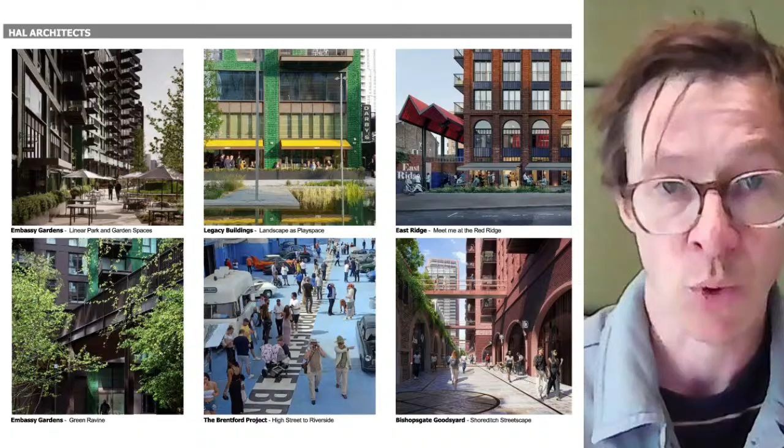Hi, yeah, so we're landscape architects, and our practice is experienced over the last 40 years with a focus on urban regeneration, which is all about community building through creating new neighbourhoods, with a focus on social activity and biodiversity. And there's a wide range of examples here across parts of London and also other places. And we, as David said, we like collaborating with HAL Architects.

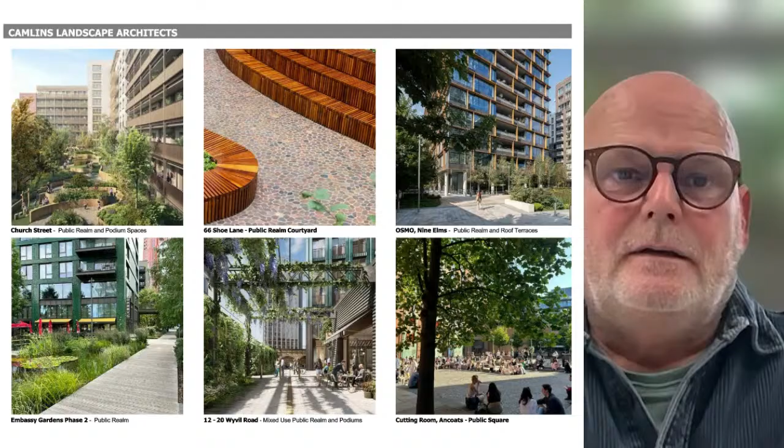Next page, please. So our approach here at Colliers Wood is actually really typical and is based on thinking about the quality of public realm and about thinking of the centre of Colliers Wood as a whole, and asking ourselves the question, how can this development maximise benefits to the place as a whole?

And actually, there's a lot of very positive things about Colliers Wood, as we all know, with the green spaces, schools, churches, public transport, road crossings and infrastructure and so on. So how can we build on that for this scheme? And there's two key moves here.

Firstly, greening of the space between the tube station and Britannia Point, where we're thinking about making a lot more greenery and including cycle parking. And the second big move is the new green link, which links from the end of South Gardens diagonally across to the entrances to the park on Merton High Street, which is a car-free link. It's a green space, playable space, lots of active frontage.

Our buildings focus on it, so it's a family-friendly space. And there are many places in Colliers Wood that are nice, family-friendly green spaces, and this needs to be like that. This needs to be a really high-quality space right in the centre. Thank you.

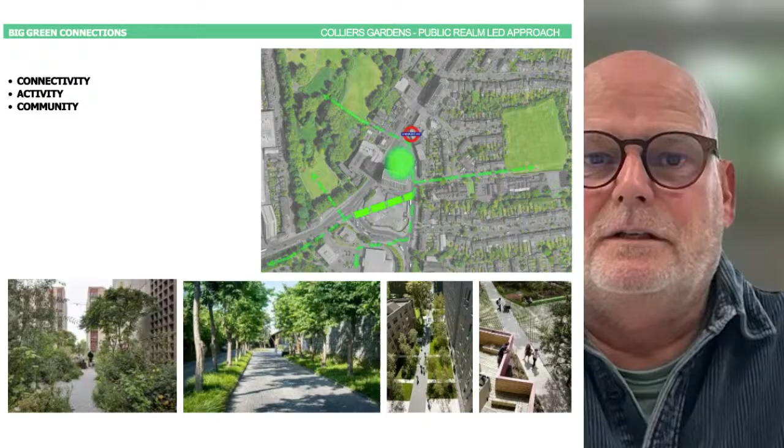Thanks, Paul. So the site specifically is located south of Britannia Point. The proposal currently is for 3 buildings organised around a central green route connecting Wandle Park with the station and Christchurch Road. We're proposing a mix of uses to include residential, co-living and a part hotel to activate the ground floor. I'll hand over to Tim Odchung, I think, to introduce the hotel offer.

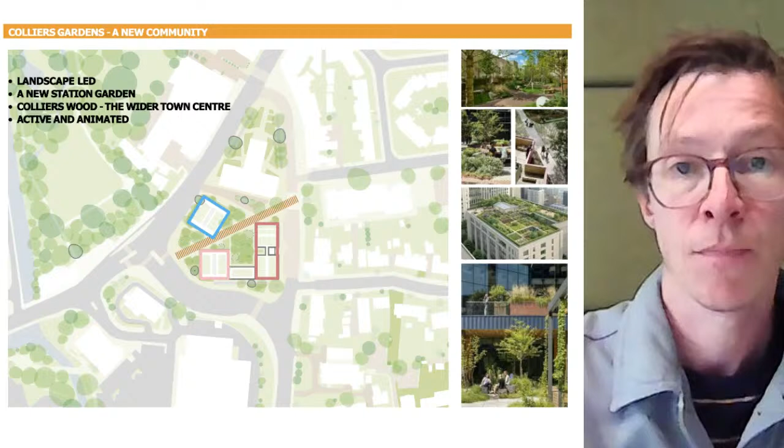Along with our residential lettings, the key thing that we do in the UK is we operate hotels. We currently operate 10 hotels, mainly around central London. And we have a few brands that we run those under. Some of them are the big brands that we have franchises with, but we also have our own brand called Zedwell. And it's this brand that we hope to roll out an apart hotel in Colliers Wood.

So this hotel is currently established in 4 locations. As you can see on this slide, we've got one in Piccadilly, one in Tottenham Court Road, one in Greenwich, and one that's recently opened in Knightsbridge.

These are conventional hotels, but what we're looking to do in Colliers Wood is a new concept that we're delivering. In the top right is what we call the cocoon room, which is very much a normal hotel room, but for Colliers Wood, we're developing a new room type, which is more of an apart hotel room, which has a little kitchenette in it, as well as a little living area, so that it's really encouraging longer stays, so that people can cook for themselves and actually have a space to be, if you like. So that's part of our proposals that David will show you how that fits in.

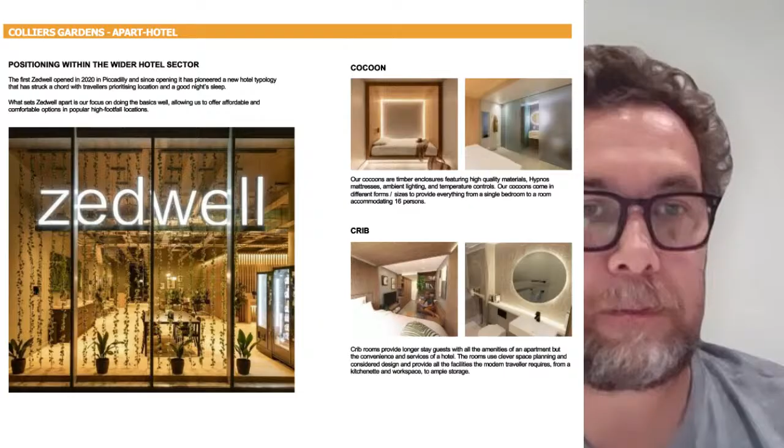Yeah, I think exactly as Tim explains, the benefits the aparthotel can bring to the site. Just to add to that, in terms of its town centre location, we think it could be a real boost for local employment and support for local businesses. The aparthotel elements are highlighted here to the northwest corner of the site.

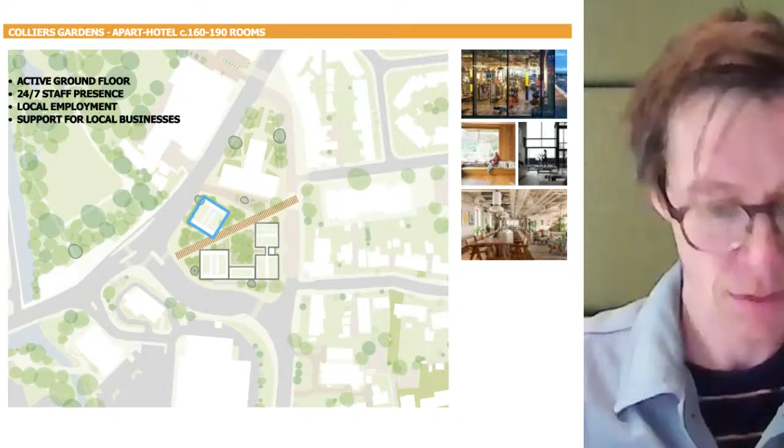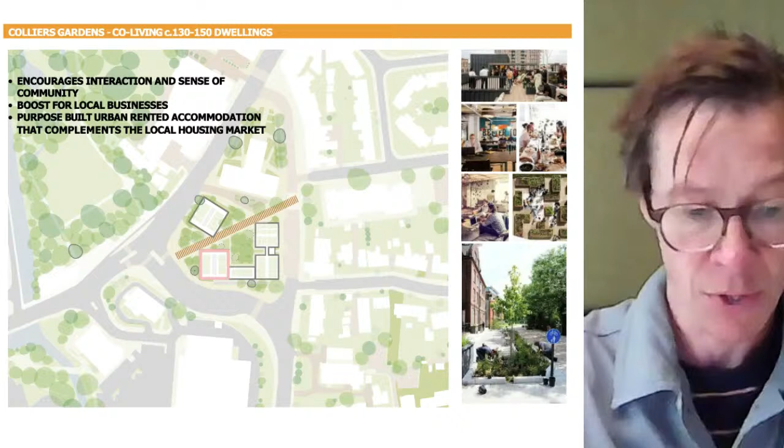Next slide please. So to introduce our second mixed use, we're proposing a co-living block, which we propose is located to the southwest corner. I think Tim or Chung can explain that far better than I. Thank you, David.

Expanding from what the team has been saying, just to provide a bit more context on co-living - we tend to get questions asked what co-living may be. To us, co-living is a modern living arrangement where someone rents a room within a communal property, benefiting from shared amenities and activities designed to foster a sense of community and belonging. These shared facilities tend to include cooking, dining, relaxing, and socializing spaces for residents and their guests. We describe it as more of a lifestyle of living that allows for sufficient individual space, whilst also providing opportunities for people to socialize within the community, either through coincidental occurrence or more specifically arranged social events. Residents can stay from anything from a month to many years, but the average stay tends to be between 9 to 12 months.

We also often get asked about who tends to use these spaces. From our understanding, young professionals and graduates like co-living as a stepping stone into a city, or perhaps a new area they want to explore, and they're not quite yet ready to buy or rent their own flat or home. So co-living offers a safe and secure environment for them to live whilst there's an established community where they can socialize and make friends. As well as other demographics - maybe individuals stationed for work purposes in a remote city for a period of time who don't want to live in a hotel environment. We describe co-living as affordable and convenient, offering all-inclusive bills and flexible leasing terms, so the process for people is more simplified and streamlined, suiting a wide range of demographics. I hope that explains co-living, and from here I'll pass it over to David.

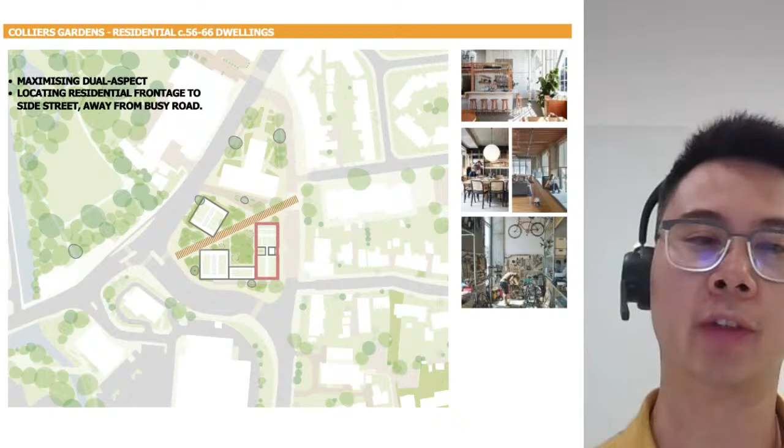Finally, in terms of introducing the range of uses, we're proposing a residential building to the east. It's located to the quieter Christchurch Road, away from the busy main road to the west. We're hoping this will allow the apartments to be naturally ventilated with openable windows away from the traffic noise and pollution.

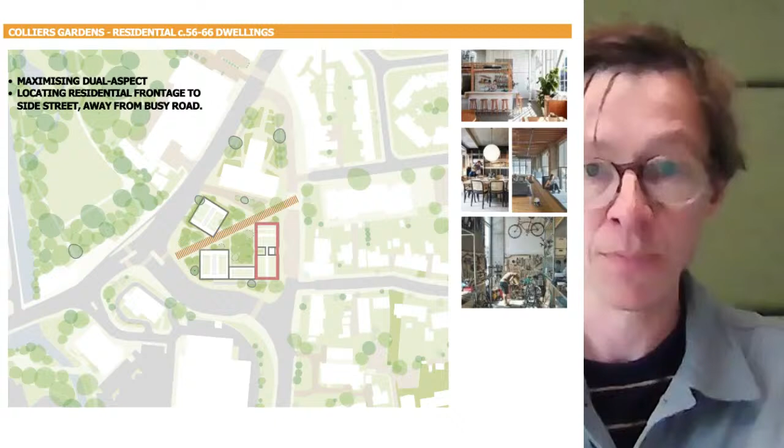Next steps in terms of our input, we're looking at refining the building footprints and orientation of the blocks to minimise the silhouette of the proposal.

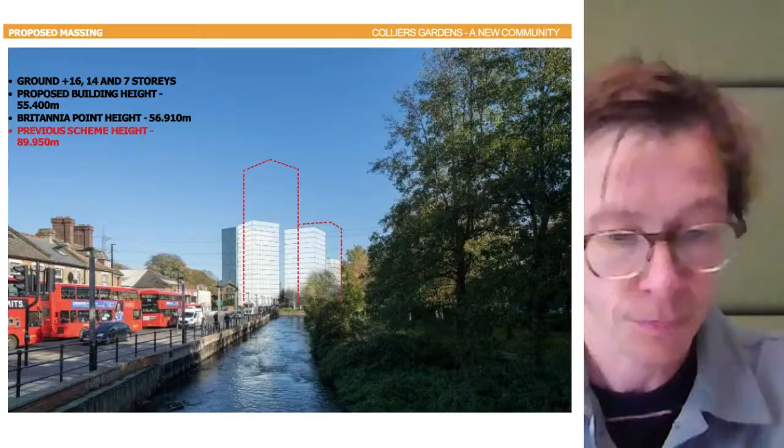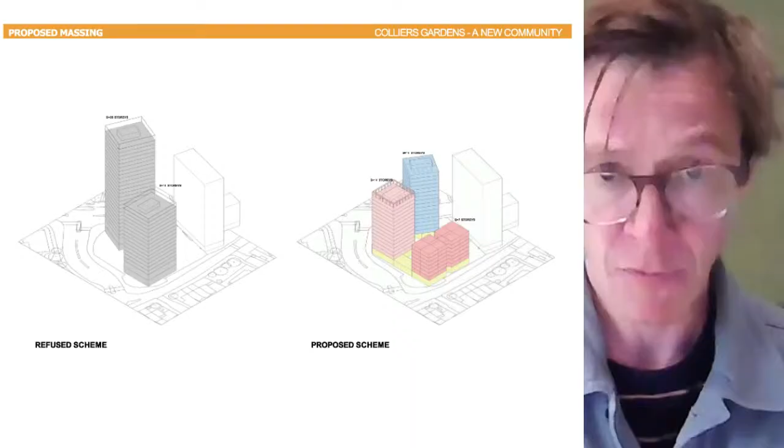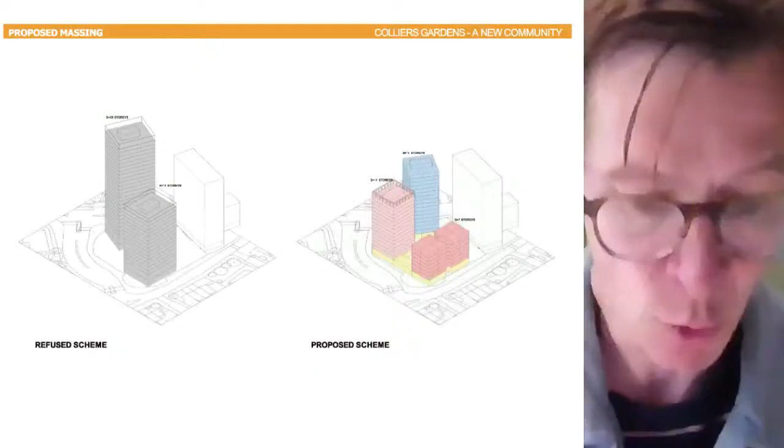These AXO diagrams are a further comparison between the refused scheme and current thinking. You can see we're now proposing much smaller footprints, shorter buildings with a quantum much reduced. The thinking behind the stepped massing is from the apart hotel to the north, stepping down to the more suburban scale to the east. We're also hoping to provide a more, in our view, coherent ground floor plan compared to previous, which integrates this green link and encourages activity.

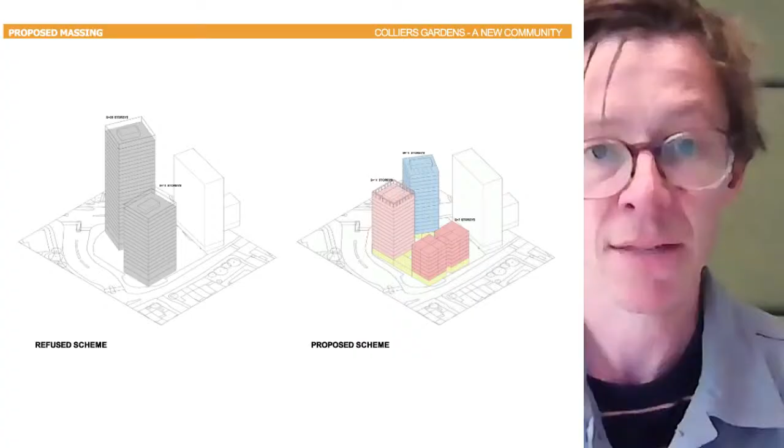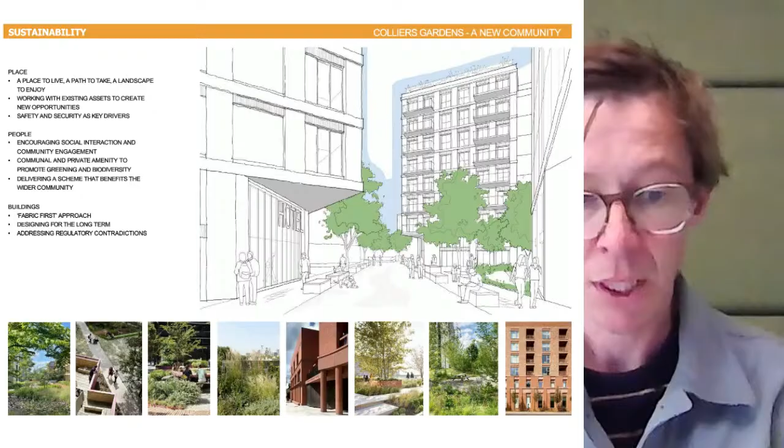Just a final slide from us on sustainability. We welcome Merton's particularly rigorous sustainability policies, which we'll be adhering to in all aspects of the design. We like to take a fabric-first approach to our design development, which basically means a well insulated building to ensure comfortable and efficient homes. In addition, we'll be looking at glazing ratios, building orientation, and potentially introducing external shading to ensure an efficient and well-detailed building is delivered.

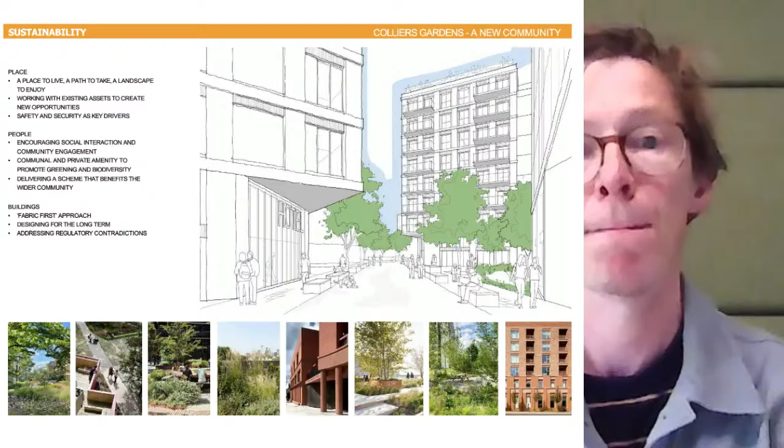Back to Chung to summarise the key benefits of the scheme. Thank you. Next page, please.

From the outset of the project, we established some key objectives to deliver, which we'd like to share. Establishing a welcoming green space for people to meet, relax, and enjoy is essential, as is establishing a new green pedestrian connection diagonally through the site to help permeability around Colliers Wood Station, strengthening the regeneration of the town centre with homes, hotels and other uses to create a dynamic environment, as well as creating interesting architecture and highly sustainable buildings with a variety of uses. We believe the additional tourism and positive impact will increase footfall, helping local businesses, while the different uses will increase employment for local people.

I hope that's clear, and thank you for your time today, back to Matt.

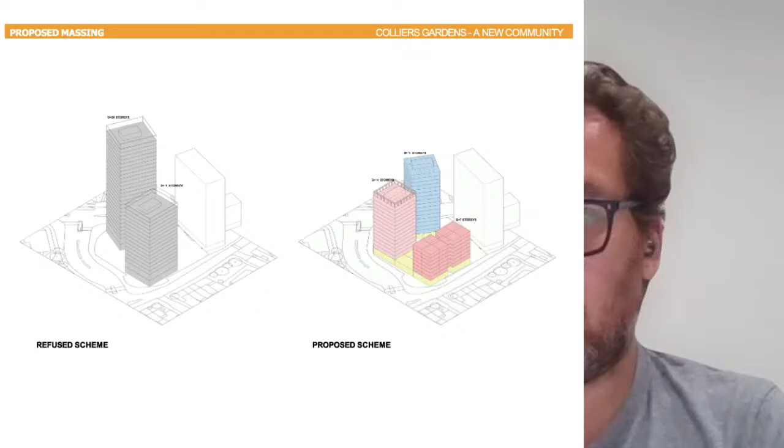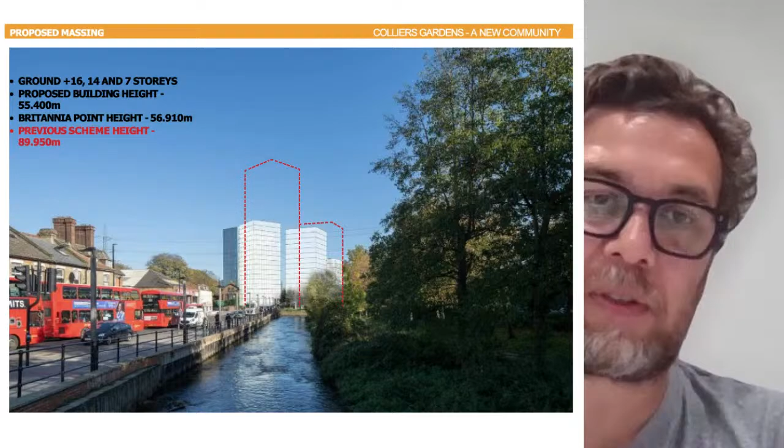Okay, thank you for that, I think that deals with that. I've only got a couple more questions at the moment, so if you're watching and have something in mind, please let us know now. Type it in the box below the video you're watching, and we'll look forward to getting that question and answering it. This is an issue that's come up quite a lot, and I'm going to turn to James.

It's about parking. Will there be parking on site, and will there be an impact on parking on local streets? James, talk to us about parking.

So yeah, we know parking is a major issue. We have to follow the rules and policies put in place by Merton and the Mayor of London. The policies are aimed at reducing dependency on the private car, and that is why developments of this nature are generally car-free.

As you'll be aware, the application site is very close to a tube station and a number of bus routes, and the level of public transport accessibility means that the supply of car parking spaces is generally discouraged. There will be some mitigation in that new residents won't be able to apply for parking permits to park in local streets. There'll be room for delivery vehicles and some blue badge spaces on site.

We should also add that evidence is that more and more people who choose to live in new developments of this nature, particularly co-living, don't own a car. Indeed, we would say anybody who has a car should consider things very carefully before moving here. We can't promise there won't be additional pressures, but the evidence is that this is less of a problem than is sometimes supposed.